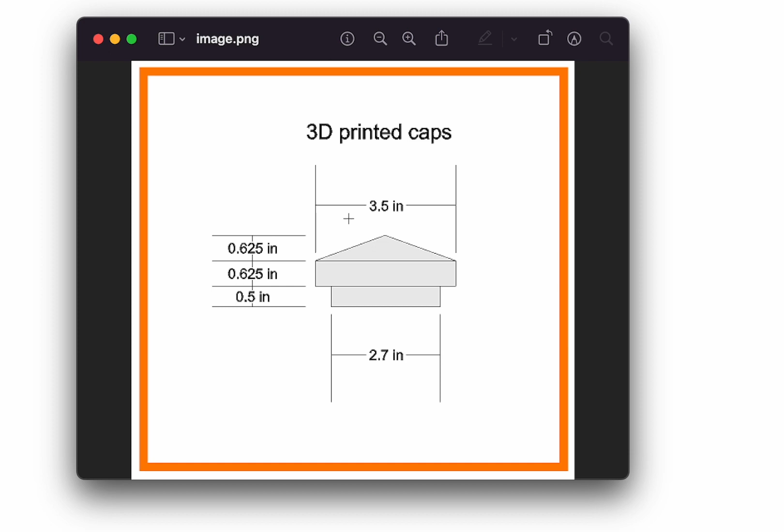So they just sent this over, this is what it is, dimensions. It's really easy, it's kind of just a pyramid. They don't do isometric drawings, so if you get a customer, make sure you know what you're designing. I'm just going to do this the way that I would do it, I'm sure there's another much simpler way. So I'm just going to draw these rectangles and cut this out.

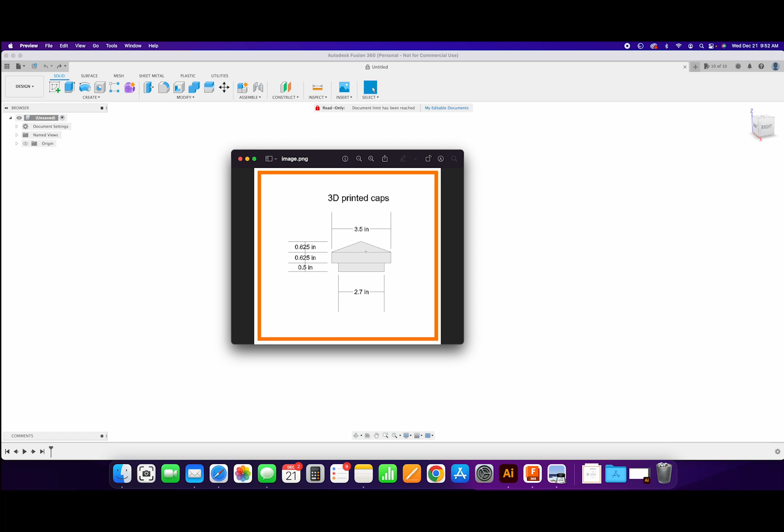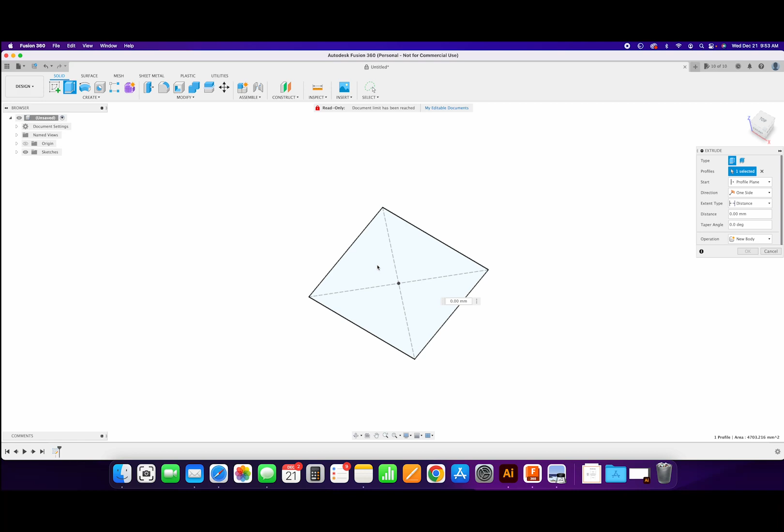2.7 inch square. So over here, I'm just going to put the sketch right here, center rectangle, 2.7 inch by 2.7 inch. And then we're going to extrude this to 1/2 inch, so 0.5 inches.

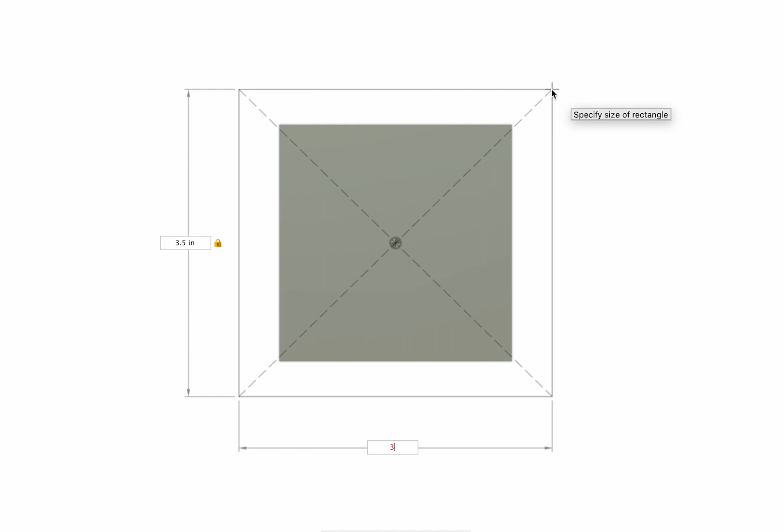And then on top of this, I'm going to make another sketch for this other rectangle here, which is 3.5 inches, so we're going to go 3.5 by 3.5 inches. And if somebody wants to tell me in the comments, I used to be able to click these and then hit extrude, but now it just gets rid of it for some reason, so I have to hit it again.

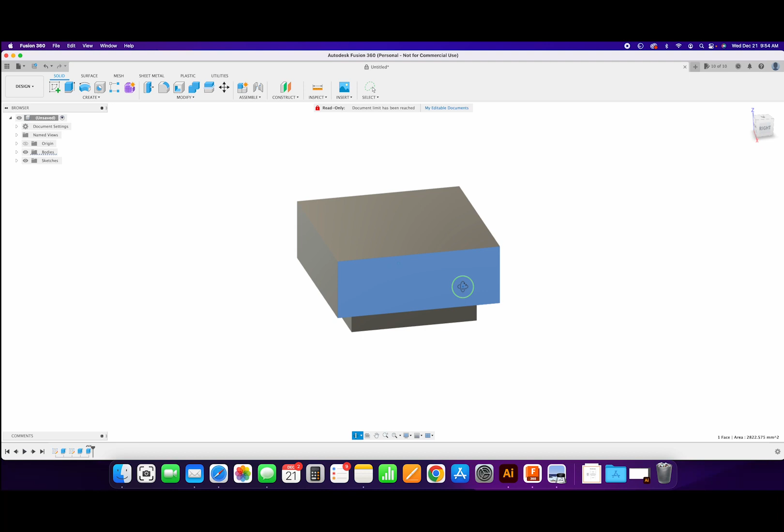So then that's going to be extruded 0.625 inches. So I need that triangle shape there, so I'm going to just put a sketch here.

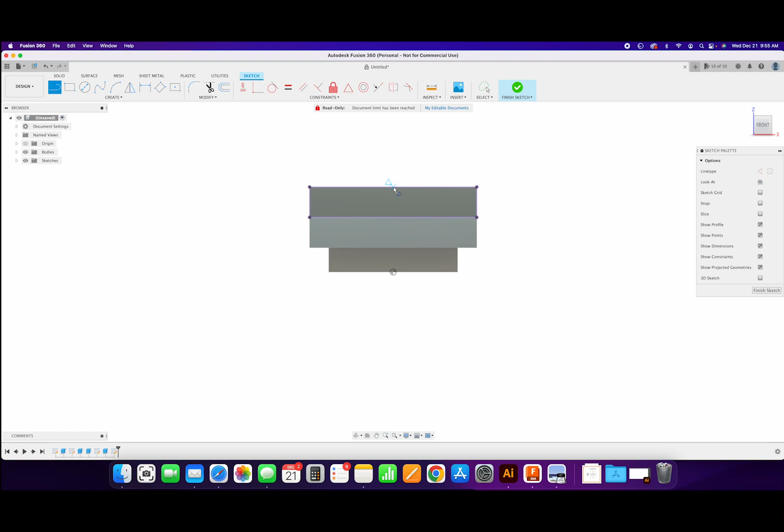Now that we have some shapes, we can extrude this and just cut it that way. So there's that, and we're going to come over here, draw a line. I'm going to project this rectangle so I can make sure it's locking to this midpoint. So we're going to go from here to here, and then from here to here. This is just the way that I do it.

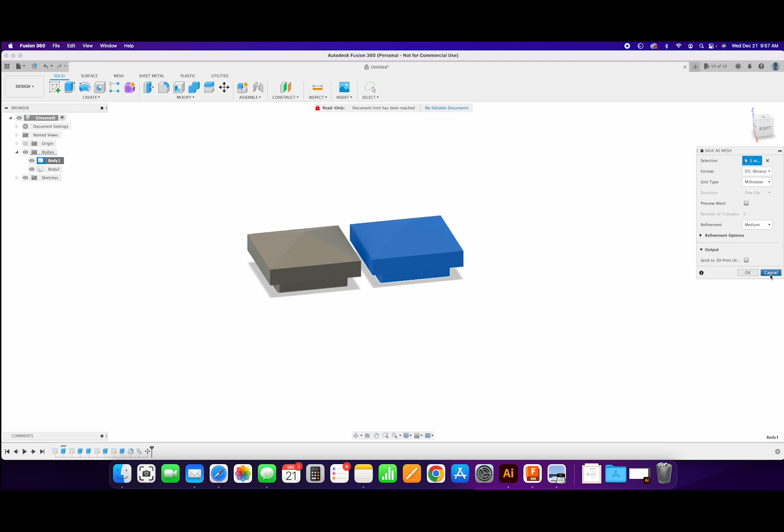So I'm going to extrude these, boom. So there's the cap. This is going inside of a square tube, so it's probably going to look something like this, just a little decorative cap there. And then we'll take it over to the printer. I'm going to have to print supports here because this is the part that's going to be exposed.

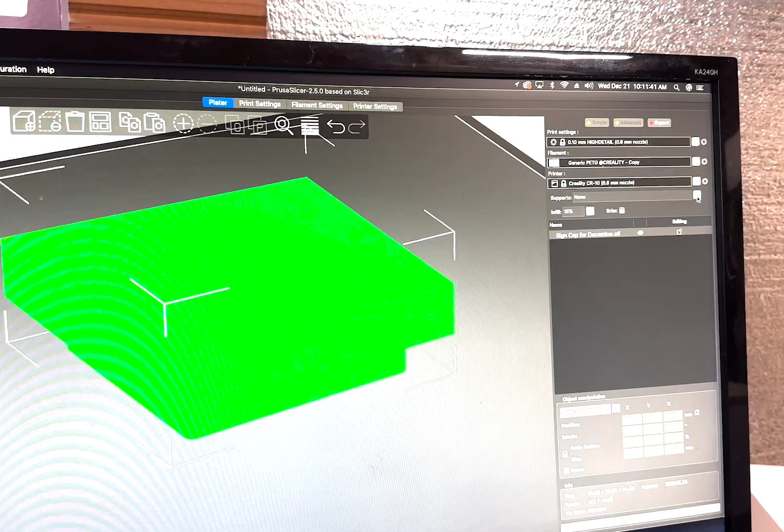So now that we're out in the shop, I have my part loaded here in Prusa Slicer. I'm going to print it on the CR10, so I loaded it in here. Again, we have this little bit on the bottom here that I have to support, so let's turn supports on.

And we're going to go to print settings and up the perimeters a little bit, maybe to like 5, because I know they're going to want to sand the outside of these. So we're going to beef it up a little bit, maybe do the infill at 20%. So this is kind of what it's going to look like.

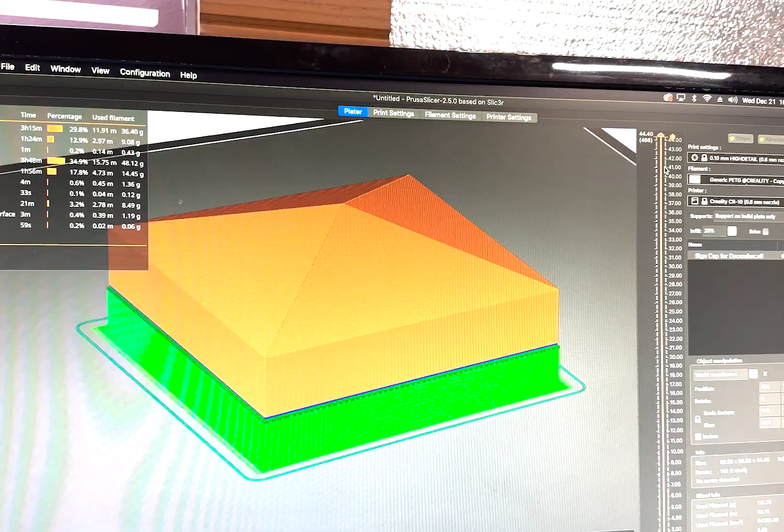This is 3DX Tech PETG, their Max PETG. You can see I just added a PVC pipe to hold my rolls here, but they manufacture these filaments in Grand Rapids here in Michigan. So it's kind of nice to go and sneak around their facility a little bit and see how much they've grown in the past couple of years.

I bought some filament from them before and it was pretty good. It's kind of weird, kind of textured, which I think is different. I don't know if that affects the prints in any way, but I've had really good luck with them. The only thing is they don't have a matte filament, which is really nice to hide those layer lines and weird imperfections, but this filament's been really good for me.

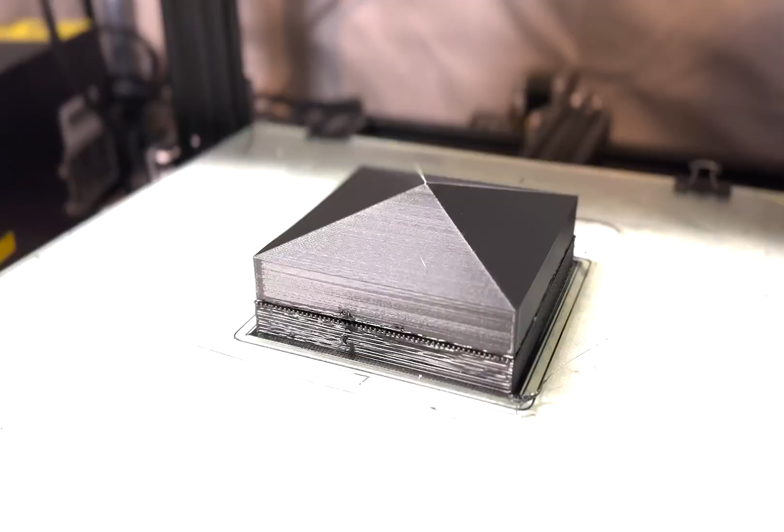Well, here it is, the completed piece. Looks okay on the top. That support got a little gross on the bottom, but like I said, that's not going to be visible, and these are going to get painted and sprayed, so they'll be cleaned up pretty good.